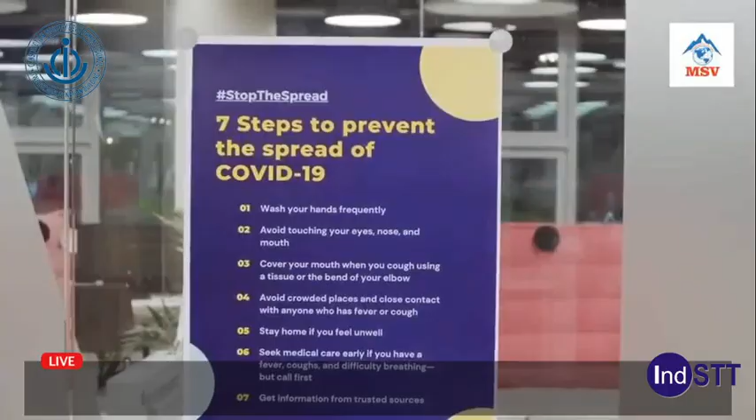MSV has visualized the challenges related to COVID, and we have created SOPs to work in these tough times. Barring a few cases, we have been successful in fighting this deadly disease and have continued to provide uninterrupted consultancy services. We reorganized and reoriented the company so that everyone remains in touch with all the team members at all times, electronically and digitally.

Our head office staff was provided with laptops, internet access, Microsoft Teams and WebEx to conduct virtual meetings, exchange files and documents, and stay connected with the team from their respective homes.

COVID-19 could not dampen our spirits, as more than 90% of our team members continue to stay at more than 100 plus project sites of MSV.

Our HR department played a crucial role and regained the pace of work in a short time. Our head office and HR stayed in constant touch with our esteemed clients and provided feedback and monthly reports regularly. Innovative approach, good leadership and high motivation paid off well.

During COVID times, MSV submitted bids on more than 200 projects and we won more than 30 projects, adding to 150 crores in consulting fee from March 2020 to October 2020, which is a great achievement.

MSV took a landmark decision to curtail company profits and release additional financial resources to provide full salaries to all our 1400 plus staff and employees during these challenging times to ensure that everybody has a smile on his face.

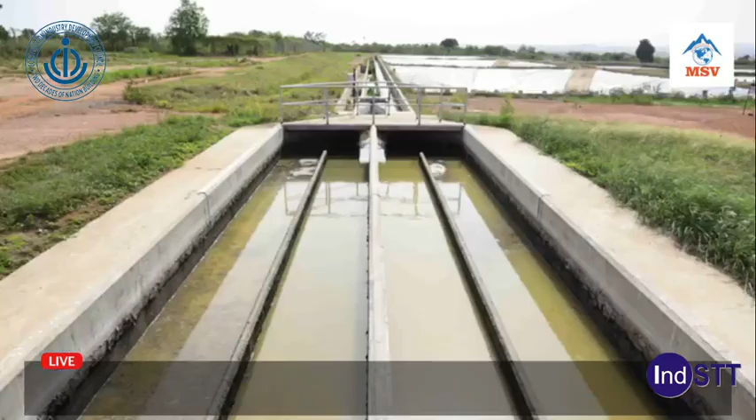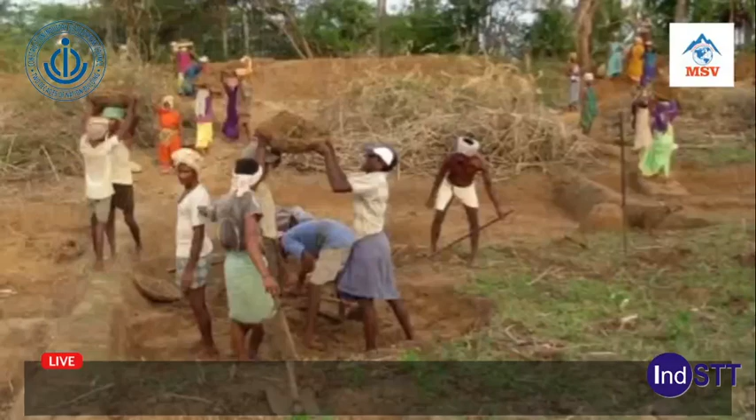We have recently finished a project in Africa for design and construction supervision of irrigation schemes for a World Bank funded project in Ghana. We also completed two projects in India which were funded by the World Bank. The first one was the Andhra Pradesh community-based tank management project and the Odisha community tank management project. I'll be talking about these projects in detail.

We also provided consultancy services for construction supervision and quality assurance for reconditioning and rehabilitation of distributaries and minors in Bhatinda and Faridkot in Punjab. We have provided supervision and quality control services for Patiala Canal Division also.

We did the Andhra Pradesh community-based tank management project and we provided third-party services. As per a World Bank study, the tank irrigation system in Andhra Pradesh is centuries old. Tank system structures were mostly constructed to support the basic human needs.

Between 1999 and 2006, agriculture grew at 2.5% per year, with almost all growth coming from livestock and fishery subsectors. However, the crop subsector, which accounted for about 60% of the state's domestic production from agriculture, stagnated. Consecutive droughts and inadequate investments in irrigation were the key factors for poor agriculture performance.

Farmers who did not have access to canal irrigation relied on surface irrigation from tanks for cultivation in addition to rainfall during the monsoon season. The state of Andhra Pradesh had the largest number of tanks, approximately 74,000, and the largest area irrigated by tanks in India.

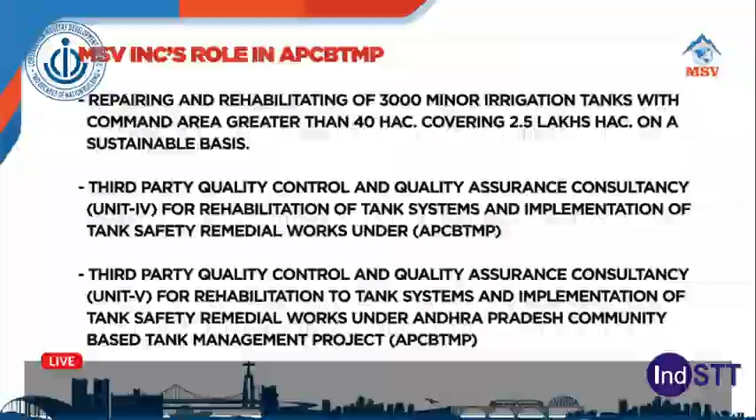MSV provided third-party quality control and quality assurance services for Unit 4 and Unit 5 for rehabilitation of the tank systems and implementation of tank safety remedial works under the AP-CBTMP.

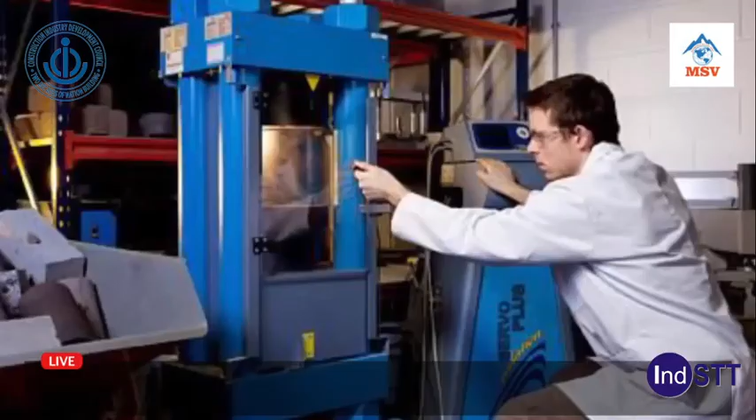The services provided by MSV on the Andhra Pradesh project were design review and review of project drawings to ensure that the quality of works along with workmanship is conforming to technical specification, to ensure sound construction procedures including deployment of state-of-the-art engineering instruments, to undertake monitoring of the quality of materials used, to carry out field tests required for assuring the quality, to suggest measures for rectifying the defects, to inspect the works and design aspects and suggest improvements, to check the accuracy of methodology and equipment used in QC labs, and to build capacities and provide professional training.

The outcomes of APCBTMP after we provided services to the Andhra Pradesh government were: firstly, agriculture and water productivity. Rice, paddy, maize, groundnuts and vegetables saw a productivity increase varying from 36% to 40% respectively against targets of 25 to 30%, so we exceeded the expectations. Water productivity, calculated as crop output per unit of water from groundwater irrigation, increased by almost 40%, exceeding the targets of 10%.

Crop diversification: rice paddy covered 75% of the cultivated area against a target of 66%, though results were better than expected in some drought prone areas.

Marketing produce: the creation of commodity interest groups helped increase the final sale value of rice paddy, groundnut and maize by 9 to 17%.

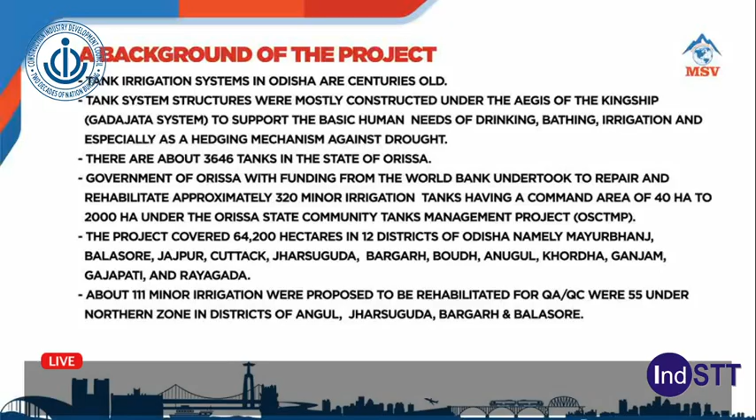Now the principles underlying the project design were a decentralized mechanism where the main tank beneficiaries play a productive role in planning, implementing and sustaining project interventions. The tank system rehabilitation work meets technical quality and safety standards and pays adequate attention to social, environmental and fiduciary considerations to improve agriculture technology and practices.

MSV played a crucial role in the OSCTMP project. MSV was hired as an expert consultant for this World Bank funded project to provide third party quality control and quality assurance services for rehabilitation of the tank systems. MSV provided similar services that we provided for the Andhra Pradesh tank management project, which I just discussed in the previous slides, and here also there was a remarkable change in the overall productivity in crops in Odisha.

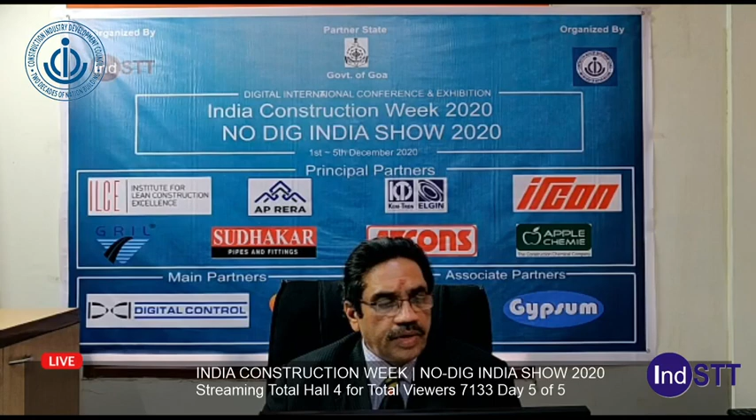Friends, we are all aware of the situation the industry is facing due to the damages caused by the pandemic. In these tough times, all the stakeholders, be it the industry, academia, central and state government organizations, PSUs, private industry, and most importantly the young budding talent across the globe, must come together to raise concerns and seek possible solutions. CIDC, being a nodal council established jointly by the Planning Commission and Indian construction industry, decided to launch India Construction Week, a conference scheduled from 1st to 5th December 2020, to provide a platform to all stakeholders across the globe so we can discuss, deliberate, and share thoughts on a common platform.

Various sectional committees were formed to ensure detailed deliberations on each sector. Each committee was chaired and co-chaired by senior industry captains and other eminent persons. To name a few: Sectional Steering Committee, Construction Chemicals, chaired by Mr. Sanjay Bahadur, CEO, Pidilite Industries Limited, co-chaired by Mr. Himanshu Kapadia along with Mr. Samir Sullakar. Sectional Steering Committee, Construction Equipment and Machinery, chaired by Mr. Ranjit More, Universal Machinery and Equipment.

Sectional Steering Committee Nigeria, chaired by Mrs. Janet, Chairperson, Governing Council of NITD, Nigeria. Sectional Steering Committee Australia, chaired by Mr. Greg McKello, Owner and CEO, Dynamic Learning Services Private Limited. Sectional Steering Committee Chartered and Works Accounts, chaired by Mr. Manmohan Agarwal. Sectional Steering Committee Media, chaired by Mrs. Uma Iyer Ravla, Media Advisor, Ministry of Corporate Affairs.

The committees, led by the chairpersons, had elaborate discussions over a period of two months and came out with suitable structural programs for their respective committees. Many eminent speakers spanning relevant subjects submitted brilliant papers highlighting the problems being faced by the industry and came out with possible solutions.

CIDC is in the process of summarizing the findings of various committees and will come out with a broad framework to be submitted before the authorities concerned. I wholeheartedly thank all the speakers, chairpersons, and members of the various committees for putting in a lot of hard work to ensure the successful achievement of the objectives of the seminar.

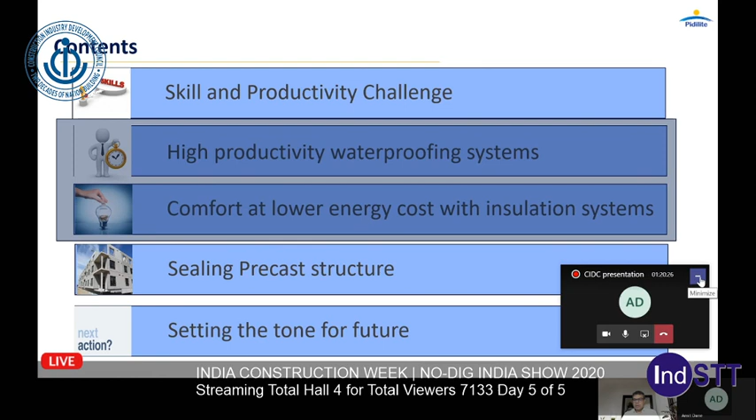The challenges we are faced with today are linked to a shortage of everything we have around us—shortage of money, shortage of time, shortage of skilled laborers—and on top of it, a lot more freedom demanded by our designers because we keep changing the usage of the building even before it is constructed.

You're constructing a commercial building and then midway you decide to convert it into a hotel, or you decide to put a swimming pool in the basement or a jogging track on an intermediate floor. The complexity of all these challenges demands different solutions than what we have been doing.

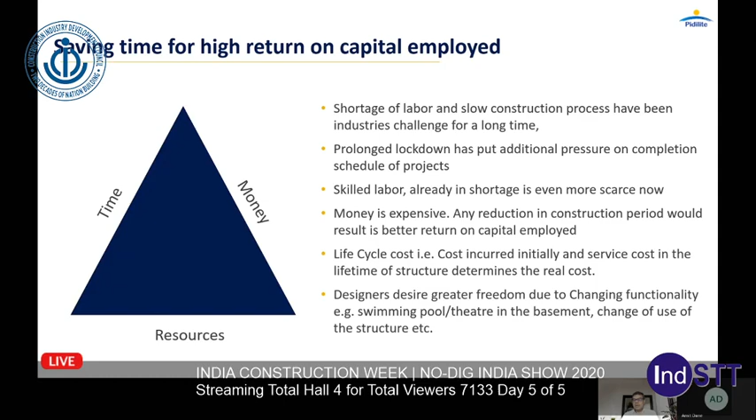When it comes to waterproofing, our age-old practice is to use stone cladding, mud fuska, or brick bats. They are all very slow and inefficient systems. A crew of 10 to 15 produces just about 100 or 200 square meters in a day, and the overall operation can take as much as 2 weeks to complete.

Of course, there have been changes with time. We have had other chemical systems coming in, which you have to brush apply, roller apply, or torch on, but none of them are either as efficient or long lasting.

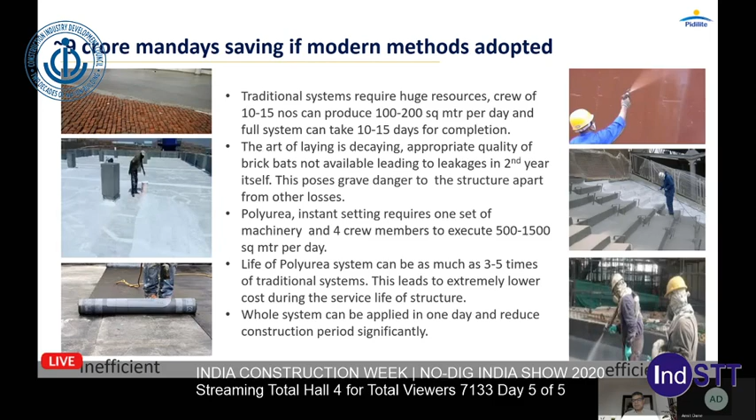Modern chemistry solutions allow us to adopt new methods, for example, spray applied materials, where just a crew of 4 people can do about 1,000 square meters in a day. So 1/4 of the skilled labor required to do almost 5 to 6 times the application in a day's time.

Various solutions are available. I would pick one for discussion today, which is polyurea hybrids. From acrylic cementitious material, we moved on to polyurethanes long time ago, which had great flexibility but not so good mechanical property. Then came hot applied polyurea with great mechanical property but not so much flexibility. A hybrid which combines the advantages of both can last for as much as 25 to 30 years. It can be applied much faster.

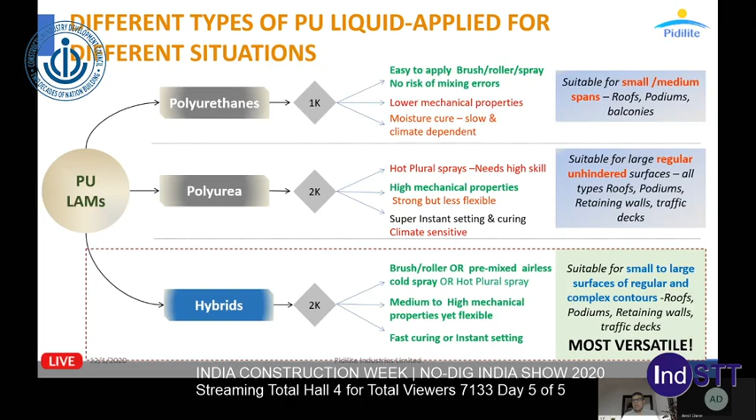This will be my proposal for today. But the story does not end here. It's also connected to the installation. Material alone can only give you a certain amount of assurance. The installation capability is another big factor in successful waterproofing application.

When the leakage takes place, your installer, provided you have a good installer, will come and seal the leakage. But water has already entered. If it is an infrastructure project designed for 100 or 120 years life, the deterioration of the structure has already started, the reinforcement corrosion starts, and your expected service life comes down.

If you're running a hotel, as I'm presenting in this case here, which is based on a real case in Bangalore some time ago, 20 leaking rooms ended up having 2.3 crore cost in repairs, refurbishment, and loss of revenue for 3 months.

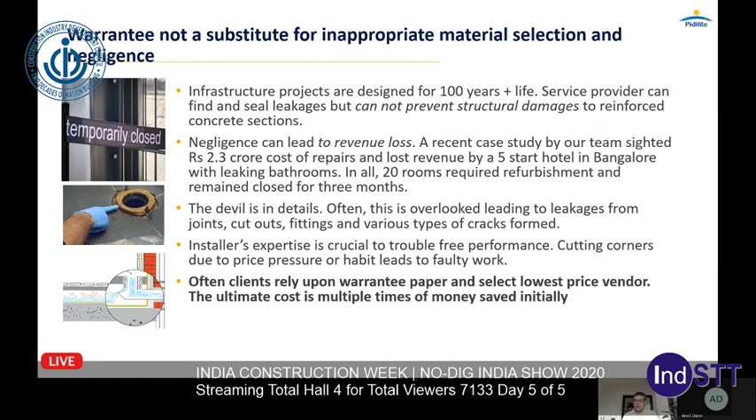The devil is in detail. A good installer understands how to terminate joints, how to use the right material in the right way. Our clients often look at the warranty paper while deciding the installer, but warranty is just a paper. It cannot prevent all other losses if the leakage takes place. So we have to be very careful while evaluating the capabilities of the installer.

Let's move on to another important aspect, which is the energy consumption. We know the impact of climate changes. Summers are getting hotter, winters are getting colder. There's flooding taking place even in cities where the water table used to be very low in earlier times. We build urban heat islands. I'm sure you all know about this term, where tall buildings and dense infrastructure increase the ambient temperature by as much as 6 to 8 degrees compared to rural areas.

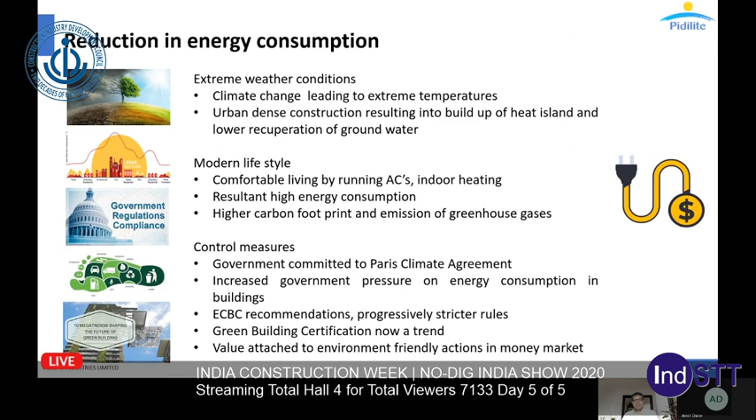Now the whole world is talking about reducing the carbon footprint and bringing back the climate control to stop further deterioration. India has also signed into these global protocols, and in turn our government and controlling agencies have also come up with measures. So ECBC, for example, has come up with guidelines to reduce the energy consumption in buildings.

The ECBC guidelines are primarily divided into 3 different categories of codes depending on the location and type of building. The primary code, the ECBC guidelines, is mandatory if the commercial structure has at least 100 kilowatt of connected load. What do these guidelines prescribe? They prescribe the U value, which in a way is the measure of energy consumption per unit area of the building.

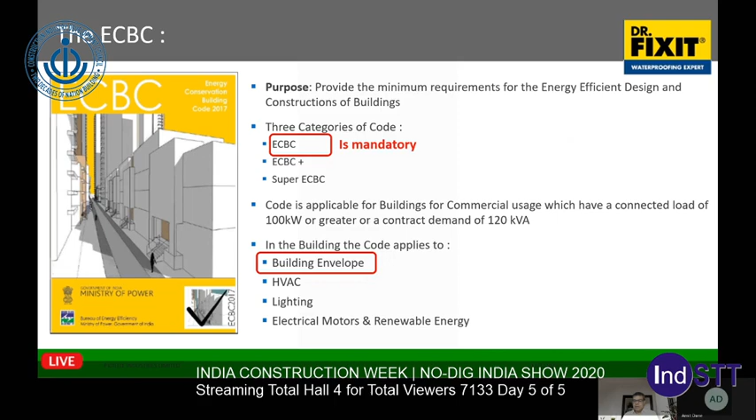Certain building types, for example hotels or hospitals where the air conditioning runs 24 hours, the requirement is even stiffer, and this is progressively being made stiffer. So we are looking at 2 aspects, waterproofing and insulation, to reduce the energy consumption in the building, both at the same time.

A 50 millimeter foam gives the same insulation as 1.8 meters thickness of brickbat coba. Of course, we won't do that much thickness, and all other materials fall in between.

Where do we apply these materials? Do we do it above the deck or below the deck? The best answer is to do it above the deck, because you are preventing the heat from penetrating into the substrate roof material. If done under deck, not only do we not prevent the heat coming in, but it's also a lot of inconvenience depending on the usage of the area where the under-deck insulation is done.

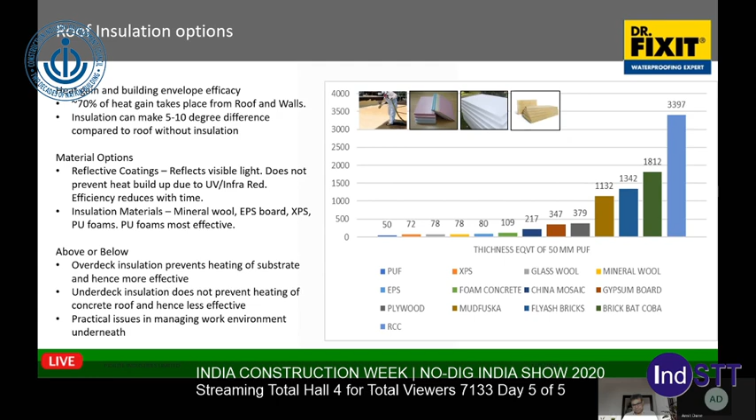As I mentioned earlier, the combined waterproofing and insulation for maximum effect is the best way forward. For commercial structures, a combination of good waterproofing material like polyurea spray and PUF with about 50 kg per cubic meter density, closed cell content of 90 to 95%, is the best solution. In about 50 to 80 millimeter thickness, you can achieve desired results.

Where the demand is not so high, we can also use thin sprays of slightly higher density foam. The advantage of this higher density foam, roughly about 60 kg per cubic meter, is that it itself is also a waterproofing layer. So about 10 to 30 millimeter thickness will give desired results, saving 40 to 80% of the heat gain.

Let me show you a video which shows the spray of this thin applied higher density foam.

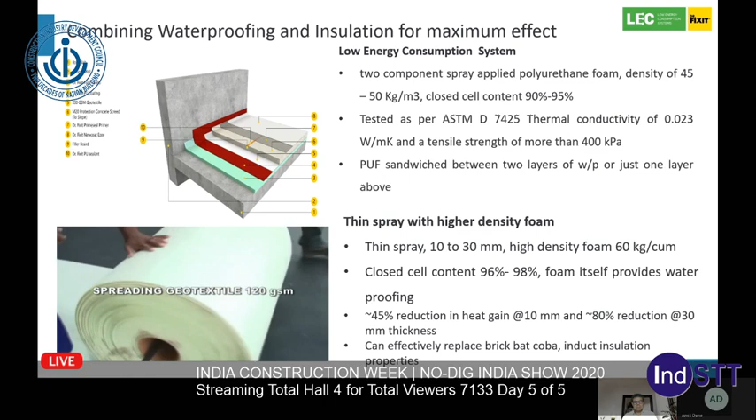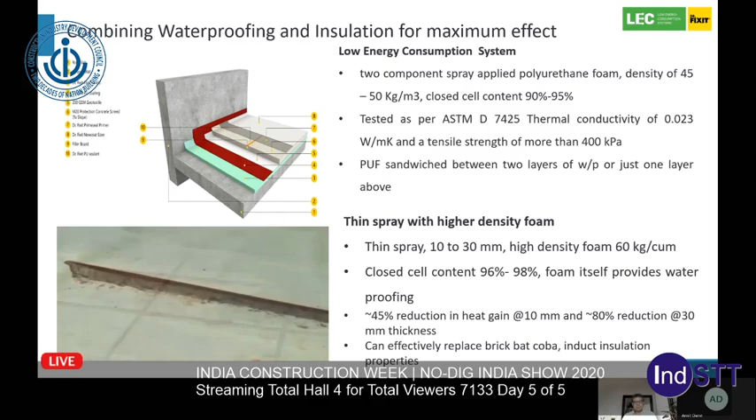The building envelope is not complete if we don't talk about the walls. The roof and the wall together are the source of almost 70% of the heat gain. I understand there's another presentation on walling systems, the external insulation and finishing systems, in this conference, so I'll not get into the details. I'm proud to show you the picture of this hospital in Faridabad, which used about 6,000 square meters of external insulation on the walls.

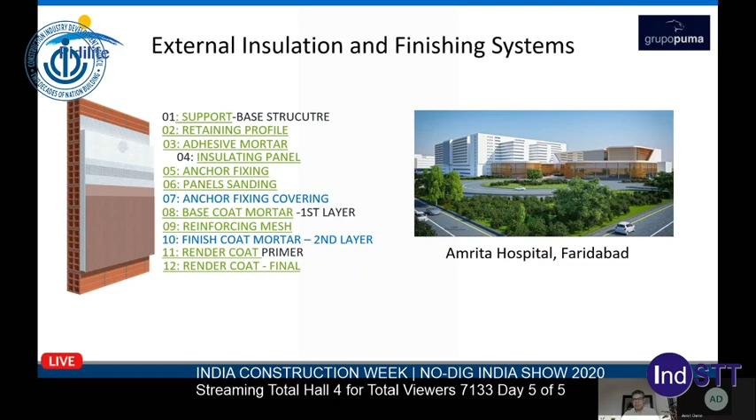Let's move on to another trend for rapid construction, which is precast. It saves considerable time. We started long ago replacing element by element in a cast-in-situ structure: the columns, then came the beams, then came slabs, and now we even have bathroom pods and three-dimensional structures like staircases. So a building is actually being built like a Lego system.

What challenges does this pose for leakage prevention? It's not only the thermal stresses, but also the deflection, which starts becoming a big consideration while designing waterproofing for precast structures. We have one more challenge: in precast structures, the work once done determines how good the performance is going to be during the service life. It's extremely difficult to find the source of leakage after the structure has been put to use. So design, in fact the waterproofing, also has to be designed with the same level of seriousness as the precast structure.

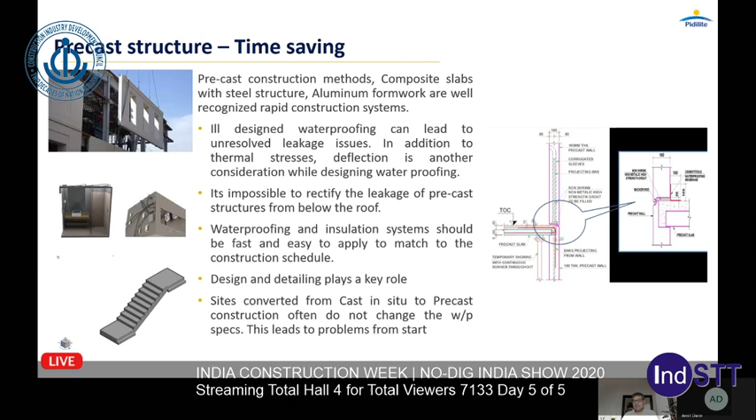We also see what is happening in the market at the moment. To save time, contractors convert from cast-in-situ to precast structures, but every other specification remains almost similar. So the same waterproofing which was chosen for the cast-in-situ structure goes into the precast structure, and then we have incorporated problems right from day one.

What essentially the precast structure demands is greater flexibility in everything we use. The joints are extremely important. They need to be sealed with flexible materials, multiple types available. I'm talking here about polyester, thermoplastic, elastomeric material for precast joints. They are embedded in the PUR system, the PUR waterproofing systems, which you apply for waterproofing.

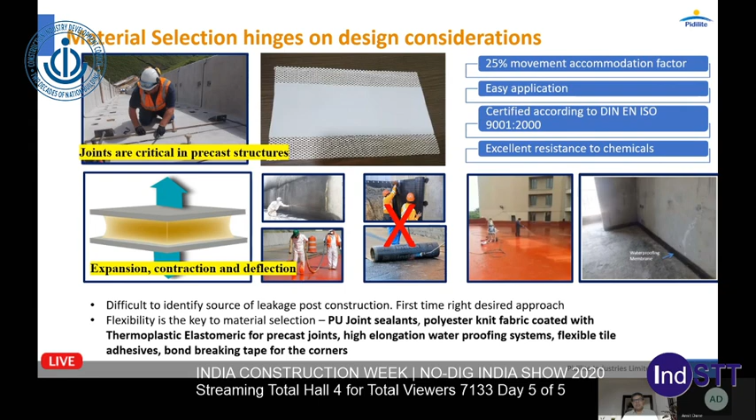We have to ensure that we use flexible tile adhesives and bond-breaking tapes on the corners. So talking to the installer and the material supplier right at the time of structure design is a prudent way of sealing precast structures.

Having covered the aspects of waterproofing, energy saving using insulation, and the critical aspects of precast, I would come to the end and summarize what we discussed. The industry mega trends, if I had to capture in 4 words, are safety, durability, productivity, and sustainability.

And then the owners have to juggle with the aspects of time, money, and resources while taking decisions on any system being used. The result of this mega trend in the way we will select and apply materials in future is looking at productivity, mechanized methods, old systems like brick-bat coba being replaced with high productivity systems like polyurethane and polyurea spray-applied systems.

Far bigger focus on energy saving. In fact, my recommendation also to the government would be to upgrade all the buildings and reduce energy consumption. While I was posted in Singapore and looking after the business in China, I was involved in projects having millions of square meters of external insulation being done onto government buildings, only because China also wants to show the world that they are serious about climate change.